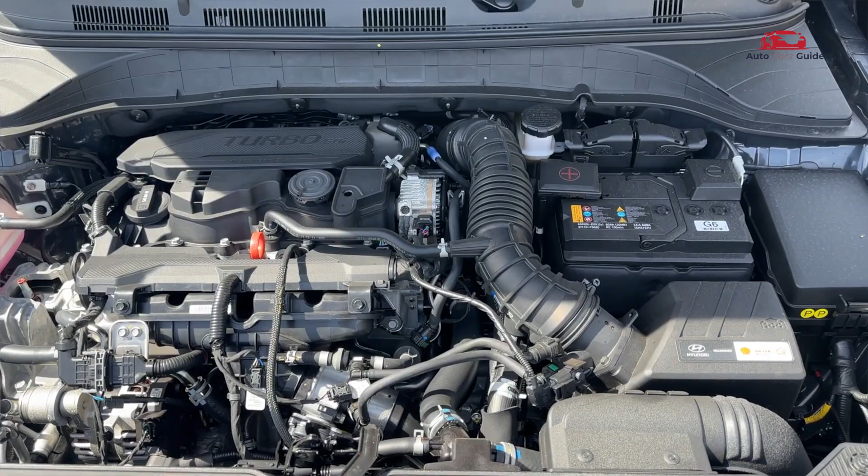Where is the fuse box located in your 2023 Hyundai Kona, and what do the fuses control? In this guide, we'll explore the fuse box diagram and location to help you troubleshoot electrical issues and maintain your vehicle's essential functions.

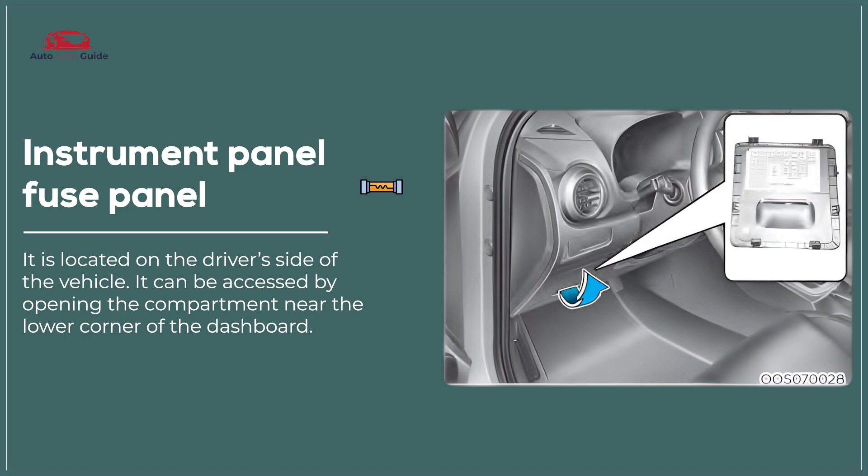Instrument panel fuse panel. The instrument panel fuse panel controls and protects electrical circuits for interior features like the dashboard, infotainment system, and power windows. It houses multiple fuses for easy troubleshooting and replacement.

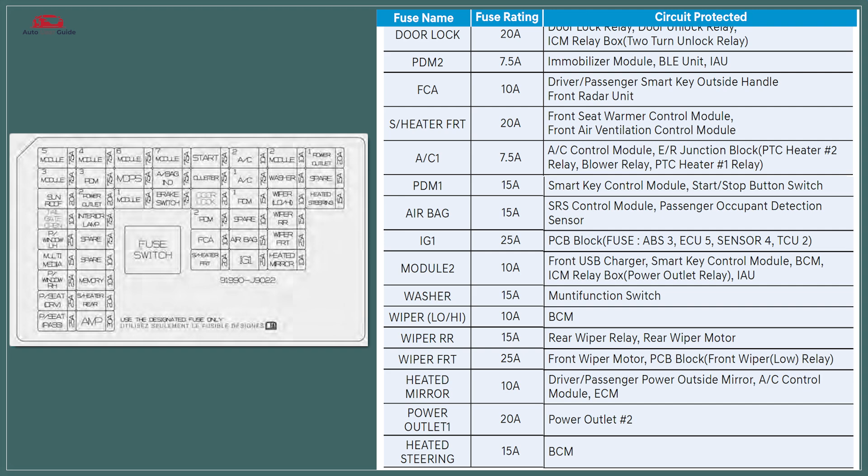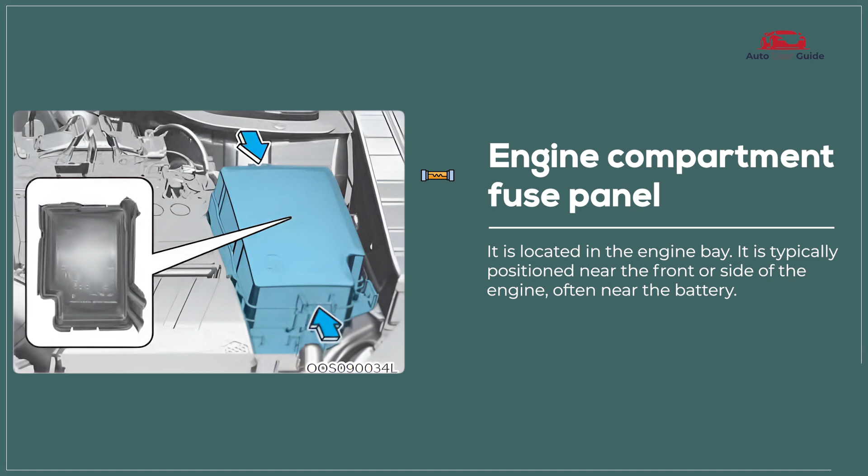Engine compartment fuse panel. The engine compartment fuse panel houses essential fuses and relays that control critical systems like the cooling fan, fuel pump, and ignition. It is protected by a durable cover to shield it from heat and moisture. Clear labeling ensures easy identification and troubleshooting.

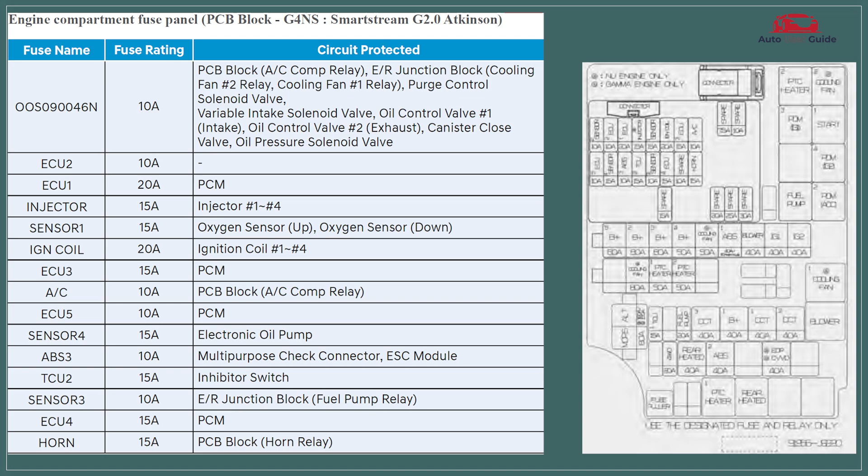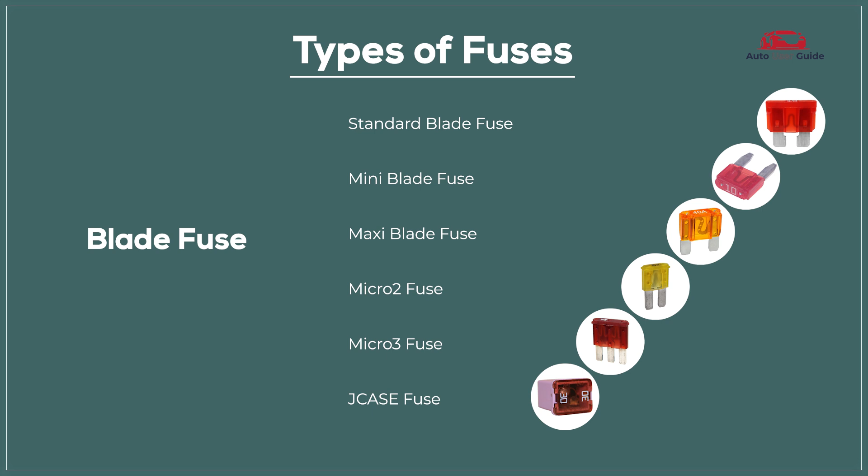Types of fuses: blade fuse, standard blade fuse, mini blade fuse, maxi blade fuse, micro 2 fuse, micro 3 fuse, J-case fuse, glass tube fuse, AGC fuse, SFE fuse, ceramic fuse, Bosch fuse, DIN fuse, PAL fuse, low profile PAL fuse, standard PAL fuse, link fuse, mega fuse, high amperage link fuse.

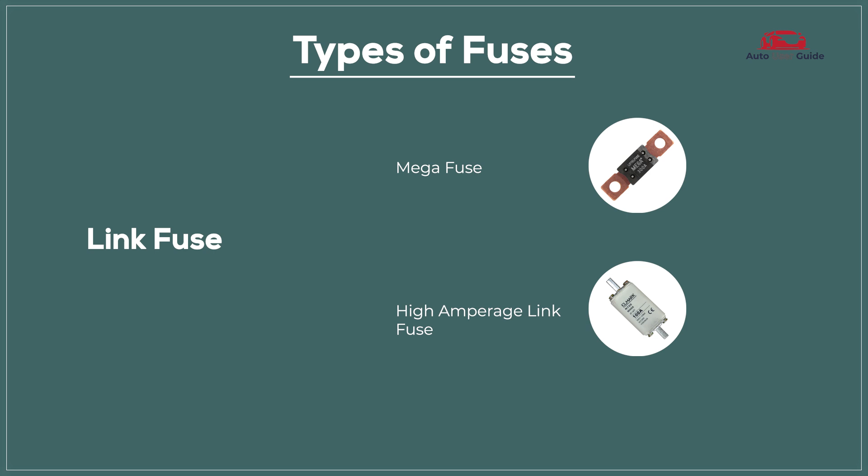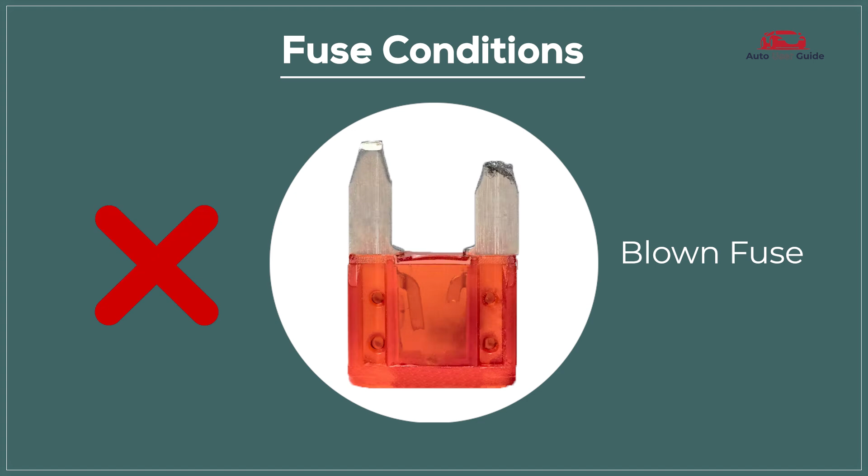Fuse conditions: a blown fuse means it's no longer functioning and needs replacement, while a perfect fuse is in good working condition and performing as expected.

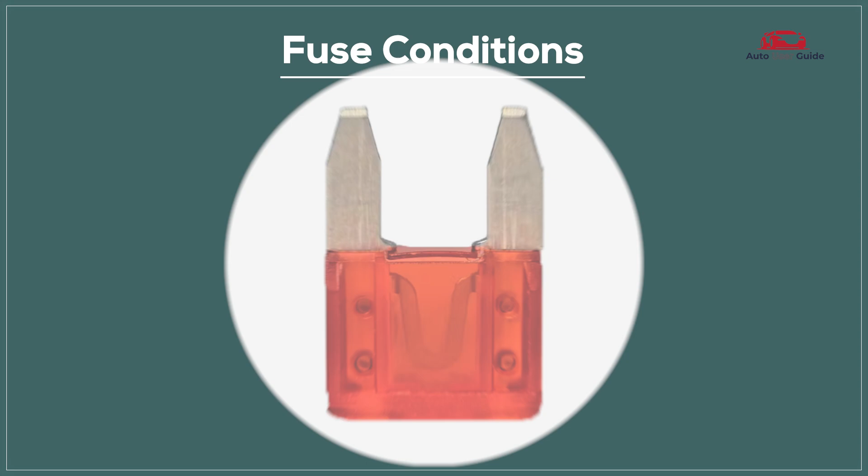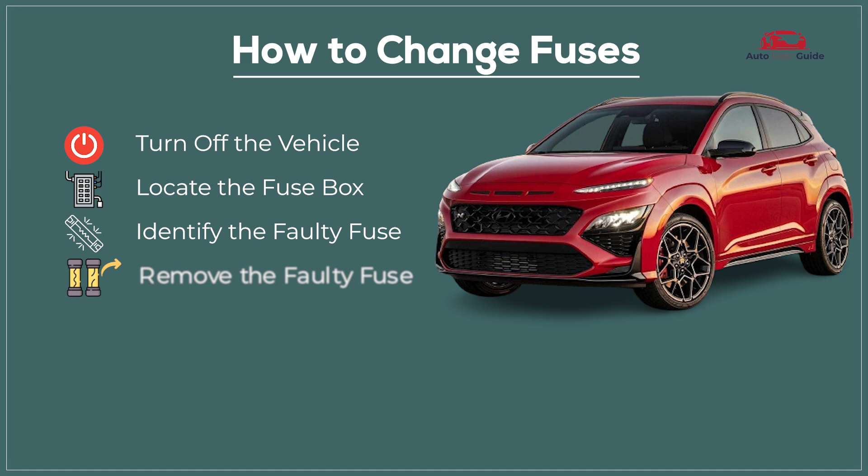How to change fuses: turn off the vehicle, locate the fuse box, identify the faulty fuse, remove the faulty fuse, inspect and obtain a replacement, install the new fuse, test the replacement.